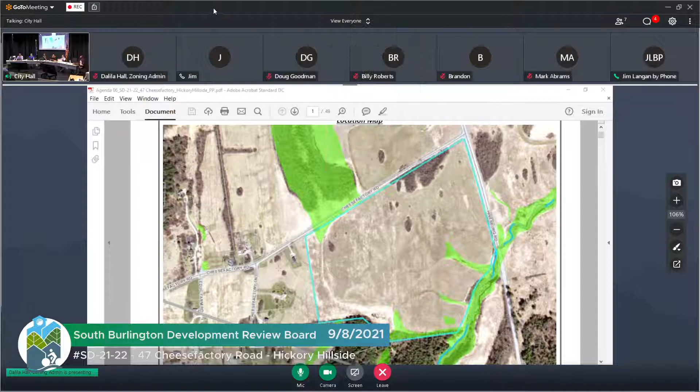Would you like to introduce us to your project? We've all read the staff report, we're all familiar with it, but it's helpful to have a little overview from the applicant. Sure. I'll briefly go into this since the board has seen it a number of times. This was the project at 47 Cheesefactory Road. It's a 67.6 acre parcel being subdivided as a 3-lot PUD: 2.6 acre lots, lots 2 and 3, and the remainder of the area would be lot 1. The majority of that would be in conservation or agricultural use.

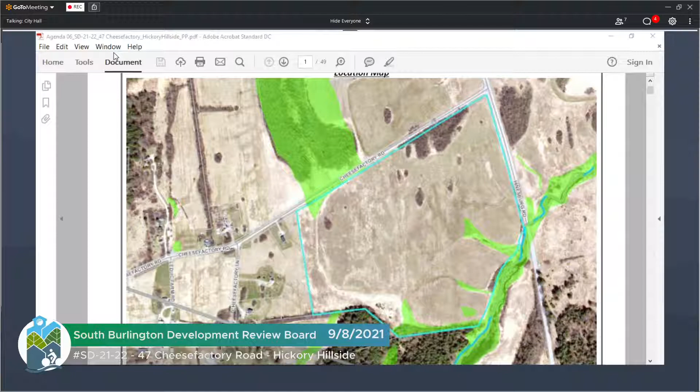Since previously being in front of the board for sketch plan, there were a few modifications that have come up, so I'll briefly go through those. Number one, we met with the state wetlands program, Tina Heath, and the wetland previously identified as class 3 to the west of the access was reassessed to be a class 2 wetland, with an associated wetland buffer. As you're aware, the way the state handles wetlands and agricultural use may vary from the way the city does. So although this is a class 2 wetland, the agricultural use currently happening is not an issue for the state. It's non-jurisdictional, meaning the associated wetland buffer attached to it is also non-jurisdictional.

So so long as there's no impact to the wetland, there's no wetland buffer, which means that the state is happy with our current proposal, which actually is relocation of the access driveway off of Cheesefactory Road approximately 30 feet to the east. So we're now avoiding the wetland.

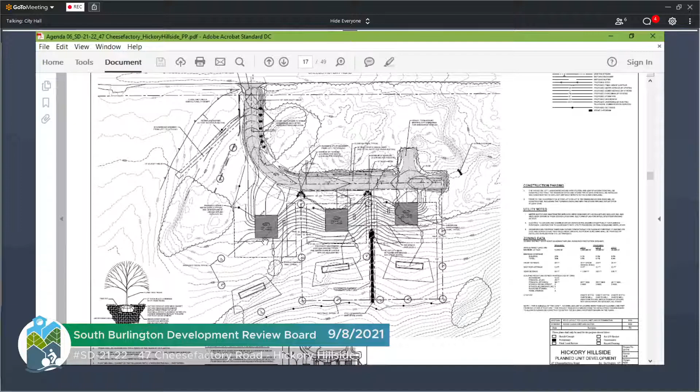So that we had some flexibility to site the houses based on the wastewater system's possible movement, and some other items as far as grading and ledge in the area. So we are requesting some flexibility in the building lots. Those are pictorial footprints for houses. Okay. Any questions or comments from the board? Staff? No. Okay. Moving on to staff comment number 2.

And this is in regard to landscaping, stormwater treatment, etc. Staff recommends the board discuss with the applicant how they have, quote, minimized and are offset by appropriate landscaping, stormwater treatment, stream buffering, and other mitigation measures, unquote, the proposed wetland impacts in the context of the functions and values provided previously in the staff report.

Staff considers if the board finds minimization or mitigation to be insufficient, there may be simple measures that can be taken to offset the proposed driveway and grading impacts. Staff recommends the board and the applicant work together to develop specific changes, if any, such that the preliminary plat hearing can be closed and the modifications addressed at the final plat stage of review.

Madam Chair? Sure, go ahead, Dan. Did our stormwater public works staff have any comments on this? No, because it's under the half-acre threshold, they kind of shut down on it and said it's under the half-acre threshold. And I said, thanks for your feedback. Okay, thanks. But the LDRs have criteria, and the criteria are related to wetland impacts. So does everybody understand kind of what happened with the wetlands and how it's non-jurisdictional for the state, but jurisdictional for us?

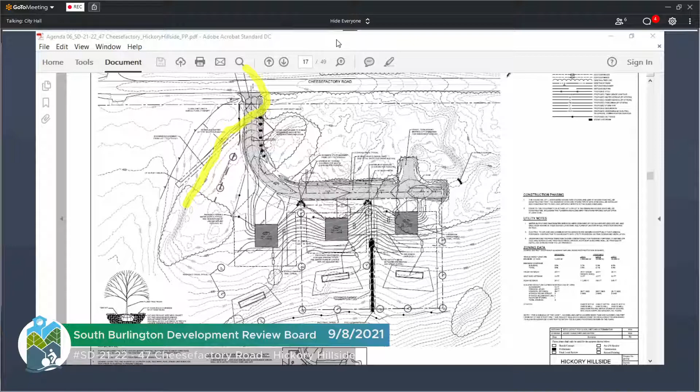And just for Nick's benefit, some of the members of this board were not on the board at the time of the last iterations. Yep, sorry. Other questions from the board? Thoughts? Do we think that the applicant has presented adequate measures, or would we like to see more at final plat? Is there much of a drainage that it's actually going to cross? Like, is there going to be a culvert under there?

We are currently showing a culvert, yep, and it does discharge, you can see, into the wetland buffer to the west of the curve. And it's not a large drainage area, but it's significant enough to have some kind of drainage across it. And if I could just point out any mitigation that we may have done, if the board deems it

that, we have shifted the driveway 30 feet to get fully outside of the wetland itself and reduce impacts to the buffer. We've removed the bioretention area that was totally within the buffer. We're providing some minimal landscaping even outside of the buffer that does kind of delineate that area. There are options for reducing the road width, although that would probably be very insignificant as far as minimizations go. But yeah.

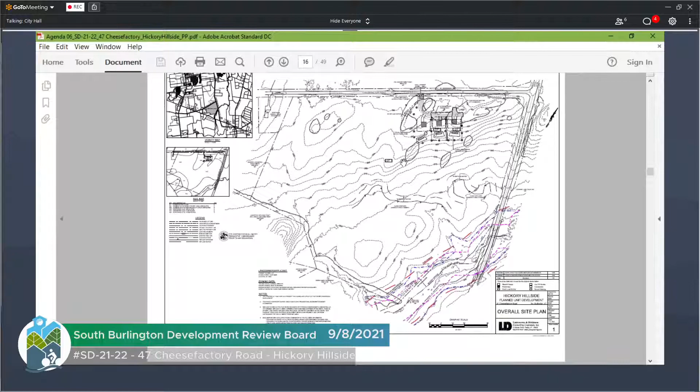And is there any kind of internal farm access road, or anytime the workers go back and forth to their housing, are they always going on Cheesefactory Road? I would assume that they would be accessing from Lot 1. That would be my thought, that they're accessing off of the internal access drive that we're proposing from the Lot 1 driveway, more than likely.

I want to make sure I understand. So they would have to go out to Cheesefactory Road? I guess my understanding is that they would not be doing that, that they would be internalizing off of the Lot 1 driveway, the lot farthest to the west there, and they would probably be accessing off of the end of the turnaround that we're showing on the far east lot. So is there an internal farm road that we're just not seeing in this drawing?

Just talking about the new proposed gravel driveway, the access driveway that's serving these lots. So if they want to access the farm, we're talking Bread and Butter Farm, right? I'm talking this lot in particular here. The farm they work for is Bread and Butter Farm. Yep. So if they want to get from their house to the farm without going on the road, what do they take? Well, they would then need to use Cheesefactory Road.

Okay, sorry, that's what I was trying to clarify. I was misunderstanding. This lot, as far as the agricultural use on this lot, they could access internally. Obviously, anything that's not on this lot, yes, they would need to go onto Cheesefactory.

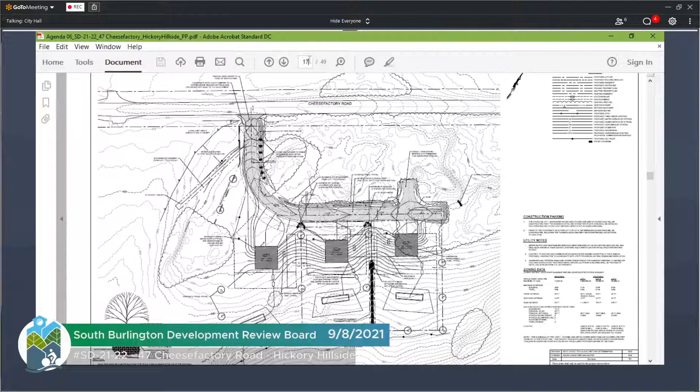Moving down the report, number 4. Staff recommends the board determine whether the road should be reduced to 18 feet wide at the wetland buffer crossing. The reduction would slightly reduce wetland impacts, but its location near Cheesefactory Road would make the turn into the private road more difficult. What's the rough distance between the edge of Cheesefactory and where this would be proposed to be reduced to 18 feet?

I'm just trying to get a sense of that. It really would likely be reduced in width for less than 50 feet, and then it would be outside of the wetland buffer, and I'm assuming it would be required to be back at the 20 foot access width. So it's bottlenecking right at Cheesefactory Road, the last 50 feet approximately. So the reduction to 18 feet would be in the right of way of Cheesefactory? It would partly be in the right of way, and my assumption would be a total of 50 feet, maybe 25 or 30 feet past the right of way. Do you have a sense of where this line would be drawn?

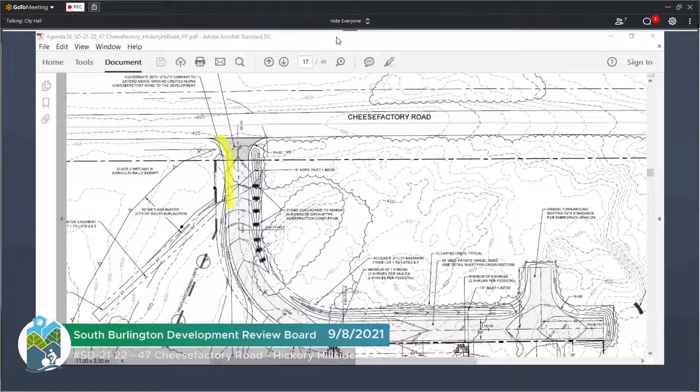It is right at the entrance, but how many trips are you anticipating, and are you seeing a lot of conflicting in and out throughout the day where this would actually become an issue? If you did neck it down and there's not a significant number of trips, it really wouldn't cause too much of a problem.

Yeah, I think that is a valid point, that there would not likely be a lot of in and out conflicts. I don't know what other type of equipment will be maneuvered in or out, or trailers or anything like that. So the standard access width may have some benefit for the maneuverability of larger vehicles. But I see your point as well, that there's probably not a lot of conflicts with only three houses on this at maximum.

So can you all think about that, and we'll look at it again at final plat? Yeah, we'll see what we can take a look. Okay. The thing would be something like the board asks the applicant to consider. Yes. Okay. Thank you. Certainly.

Number 5, staff recommends the board discuss whether they will require the applicant to reduce the width of the lots to meet this criterion. Staff notes the board approved the proposed lot dimension in SD 19-35, but since that approval is expired, the board is in no way beholden to that decision. Okay. What do we do with this? Board, should we require the applicant to reduce the width of the lots?

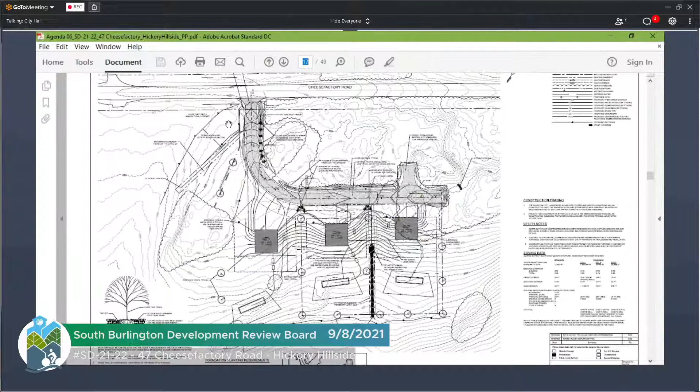I have a more basic question. Sure. We've got 3 lots here that are all supposed to be farm labor housing, right? Owned by Bread and Butter Farm, rented to Bread and Butter Farm. I don't know if that's going to be an easement or in any way enforceable. But it's all one common owner really, so is there a way to have 1 septic lot instead of 3?

We are exploring the possibility of combining this wastewater system into one system, especially in this case where you've got quite a bit of elevation change. You might be able to reduce a couple tanks because there is the ability to centralize that. We haven't gotten far enough to determine what will be most efficient, but there is a chance in the future that would happen, and it would require a shared easement between all the lots over that septic system. It is something we are considering, but we just have not gotten into the full design on that yet. Thank you.

Other questions, Jan? Is it feasible to have lots fully compliant, can you do this with lots that are essentially half of what you're proposing? Because I'm looking at staff comments saying the applicant is proposing lots double this size.

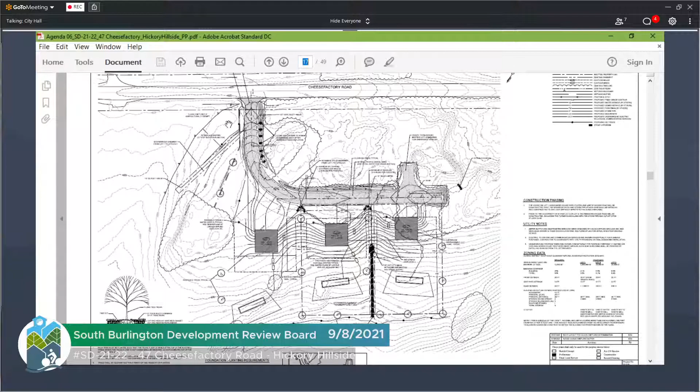If it were any other applicant besides a farm, we'd say you need to be closer to the lot size. Well, this is the minimum lot size, correct? So this is about the lot width to depth ratio. And the purpose of the width to depth ratio is to create lots that have sort of a neighborhood feel to them. So narrow, deep lots tend to push the buildings towards the street, and people are more engaged in their neighborhood. And Delilah's the planner in the room, so maybe you can speak more to this, but is that generally correct? And that makes for a friendlier neighborhood.

Right. More engaged. So the idea would be having skinnier lots would make these homes closer together and have sort of a friendlier neighborhood. But given that there's only three, that's sort of the counter argument, like, why bother? There's only three homes. And they probably know each other anyways because they work together. And we don't want to be together after work too.

Exactly. And we were talking too about the building setback envelopes that we were proposing earlier. So as you can see, they are pushed up towards the new access, so they wouldn't allow for these lots to be very far backward, very far south, I should say. So it does accomplish, it sounds like, the goal essentially. Are we ready to move on, or do folks have other questions?

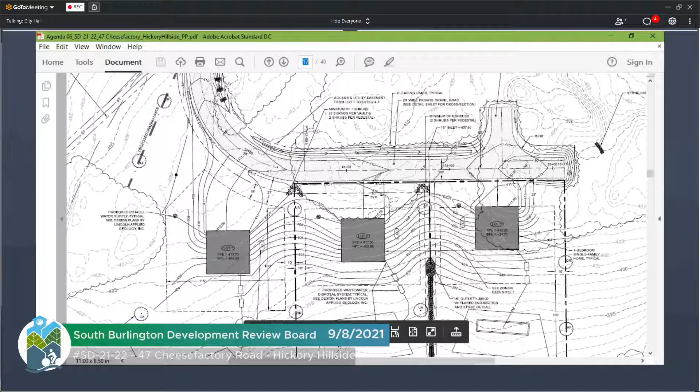I think that's it for the staff comments. Are there any general questions or comments, folks? I have a question more for staff. Are we hypothetically approving this as just single-family homes that are allowed? Or are we approving this as farm dwellings? Because they're all still going to be owned by Bread and Butter, right? So they can't be sold, right? Is that correct? That is not a condition of the city's approval.

However, in the packet, the draft conservation easement does have some restrictions on the use of this subdivision. Let's see. You don't have that at your fingertips, do you, Nick? My apologies, I didn't read that. I have it in front of me. There's kind of a lot of restrictions that get placed on it. Here it is, it's page 32. This is the farm labor housing, paragraph 11. They can construct 3 residential dwellings with customary appurtenant utilities and improvements. And then it lists what shall be freely alienable.

Oh wait, sorry, that's the access for easements and things. So the land trust conservation easement restricts the use of them. And so by incorporating this into the DRB's decision, it would be restricted in that way. I guess what I'm trying to get at, because I can't read all that right now, and I apologize, I should have read it before, is if we're approving this and we're approving the easement, I just want to be sure that this doesn't basically become open market rental, that it's serving its intended purpose.

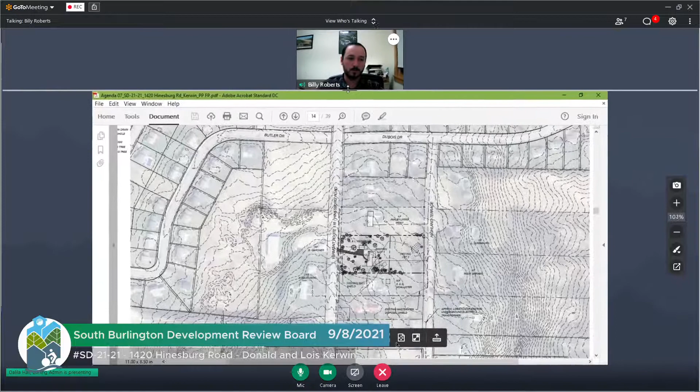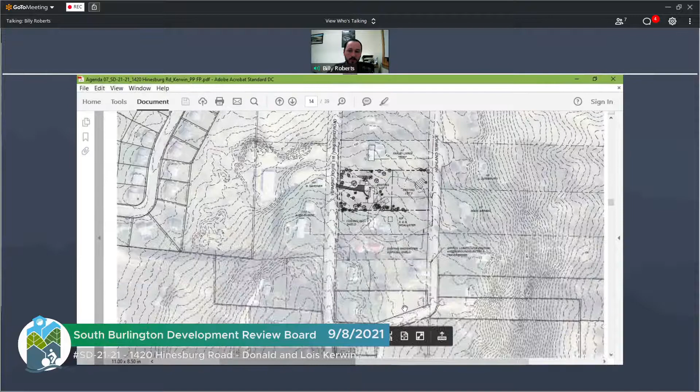This application seeks to divide lot 2 into 3 equal lots, which would make it a PUD. This is southeast of Butler Farms. The connection point would be on Highland Terrace Road, which connects off Dubois Drive and loops down to Route 116 Hinesburg Road. This application seeks for each house to have its own driveway, and each home would have access to an on-site drilled well. Two of the houses would share one well, and one house would have another well drilled. All the wastewater flows would go to municipal sewer.

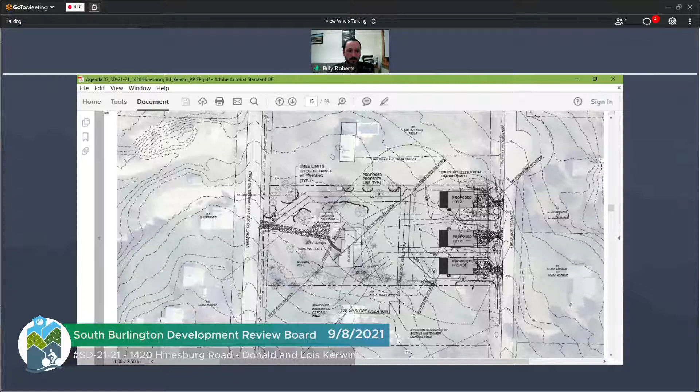And yeah. Is that it? Yes. Okay, good. Thank you.

So let us look at the staff report and go through the staff comments, and the board can share its thoughts with you, and you can respond to the comments as well. The first staff comment is the applicant's plat plan notes the lots are 12,000 square feet, while the application form indicates 11,979 square feet. Staff recommend the board ask the applicant to clarify. If you could do that, please, that would be helpful.

Yeah, so these are 3 equal lots, they're all 12,000 square feet in size. Okay, thank you. Does the applicant need to make any changes to any of the documentation? What the plan says governs, so I think they are okay.

Okay, thank you. Number 2, staff recommends the board consider whether the scrub tree area on the east warrants requiring the applicant to minimize disturbance to allow for tree preservation. Staff notes the location of the home supports a strong street presence, and preservation of these trees may detract from that presence. If the board determines the applicant should preserve trees, staff recommends the board require the applicant to update the plans to reduce impacts and show a limit of tree clearing.

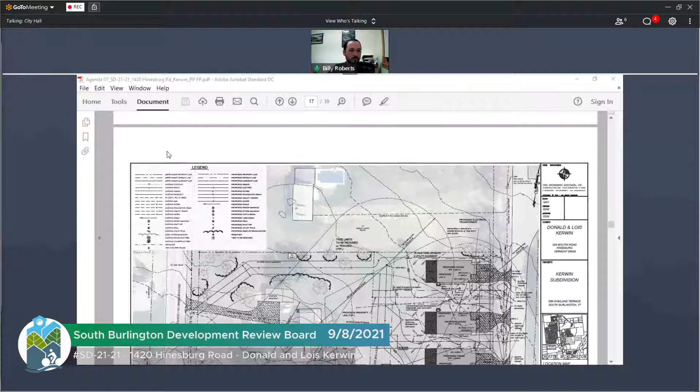So I guess we'll ask you, Billy, if you could respond to this, and the board can ask any questions. Yeah, so right now we're showing there's a lot of scrub trees that aren't that visually appealing, and a lot of these trees we are showing to be removed for installation of utilities. The removal of these trees would allow for a fresh start in the area. It's kind of an overgrown area, not really well maintained.

So a fresh start might be beneficial for this. So when you say a fresh start, are you talking about removing all the scrub trees and vegetation there and making new plantings? The option for new plantings would be available. We are not proposing any plantings at this time, but we are proposing to remove all the trees along Highland Terrace for installation of utilities that would support the project. I'm sorry, did you say installation or insulation of utilities? Installation. Okay, thank you.

So, questions about removal of the trees? Just to be clear, the entire frontage would be stripped to accommodate the utilities?

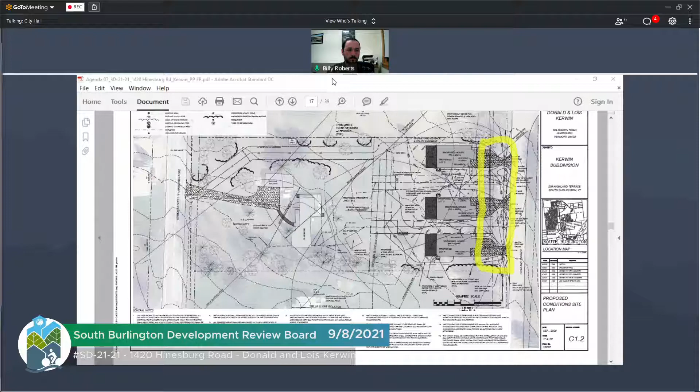Yeah, that's correct. And I guess what I'm getting at is, is this one of those things where we're essentially approving the lots and individual homeowners can do what they want at the time? Well, this is a PUD, so not exactly. There are restrictions.

I think the board tends to be a little more flexible when it's not intended to be a large neighborhood, but individual lots that are stuck with being a PUD because of their location in the SEQ. But the board does have the authority to place whatever restrictions they feel appropriate on these lots.

Personally, I'm okay with the 3 separate driveways because you're trying to create a neighborhood feel. That's okay to me, and I guess to the extent that some of the clearing can be minimized, only to not shock the neighbors across the street, then come back with some ideas or options, or maybe it's a combination of some clearing plus some new landscaping elements. That's kind of the way I feel.

So just to be clear, this is preliminary and final plat, so they won't be coming back for final plat. Okay.

Other folks, comments, questions? What is our pleasure then? Shall we? Well, one other thing we could do, I don't quite remember if it was in the...

We could go to Google Street View and kind of look at the trees too. Okay, I know I'm putting a lot on you all of a sudden. Have Delilah stop sharing in order to bring up the internet.

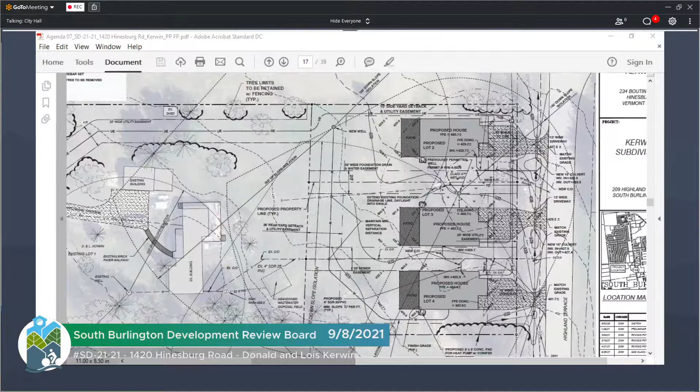Can you give us any guidance about what's preferable in design? Well, if they're in the city right of way, they're the city's responsibility to maintain.

Billy, there's no overhead utility here, right? No, not on Terrace. Okay. I don't know that we have... typically the arborist reviews what they propose and approves the type of street tree.

So can we require a certain number of trees in consultation with the city arborist in our future decision? I think that's reasonable. If you're specific about it: deciduous species with a caliper no less than 2.5 inches at installation, 2 per lot near the eastern property line, or 2 per lot within the city right of way near the eastern property line, whichever you prefer. I think that's specific enough.

Okay, board, what do you think? Right of way or property?

Does the city have other plantings along this road that it maintains? No, not on this road, I don't think. But elsewhere, other developments get street trees. Dubois Drive, I believe, has street trees. So they're not that far off from other places.

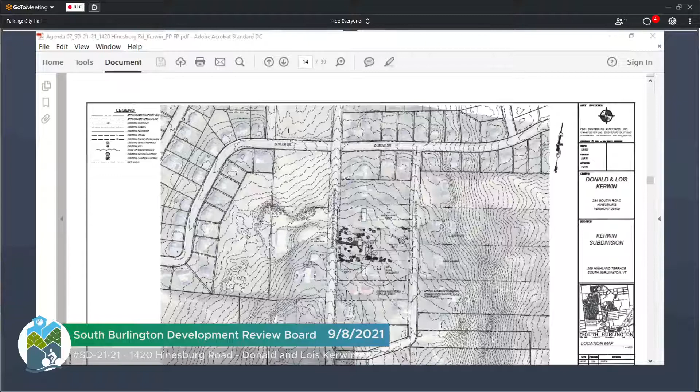And the board has the opportunity to revisit this topic if the public comments are relevant and interested in changing the decision. Would you mind sticking around while we get through the staff comments, and then we'll be glad to hear you? Yeah, I'll try to do that. Thank you, what is your name please? Mark Abrams. Oh yes, we've heard you in the past. Thank you.

Okay, staff comment number 3. Staff considers this response does not adequately address the related criteria, referring to the applicant's response to the criteria or values outlined in the Vermont wetland rules. Staff recommends the board discuss the above 3 criteria, A through C, with the applicant, including responses to the following questions: What is the wetland's ability to carry or store floodwaters, and how will that be affected by the project? How will the project minimize sedimentation? The driveways are proposed to be gravel. The wetland functions and values may not be significant, but how is the proposed condition an improvement over existing?

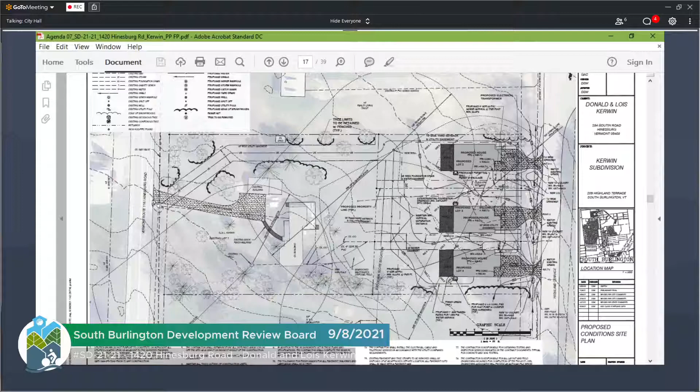Can you go to the map and get out the magic marker and show us what kind of wetlands we're talking about and what is the relative impact? Because we're trying to balance the wetland impacts with some good density here and small lots. So the wetland is, oops, let me try again. Wetland is here-ish. And it's a class 3. And then the buffer, you can see, obviously is around the wetland. It's kind of a bullseye. Sorry, that was me.

So, and again, because I'm still relatively new to this, given this situation, there obviously would need to be mitigation measures because the impacts are right on top of the wetland and the buffer. So, what would be some things that those in the professional community would recommend? Is it additional landscaping along the back of the lot to help, I won't say recreate a wetland, but provide some of the treatment functions that a wetland provides through more vegetation?

Well, and I think that's where the functions and values come in. Knowing what functions, however limited, this wetland provides. If it's habitat, some vegetation may be useful. If it's stormwater treatment, a little bit of detention might be appropriate. You know, if it is, I don't know, whatever other functions, I think the mitigation, if mitigation is required, should be tailored to the functions.

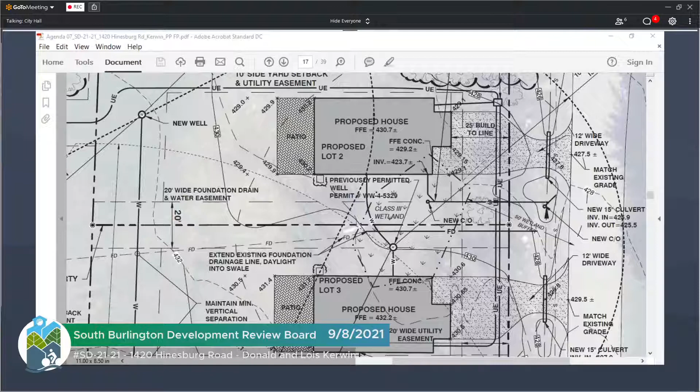Okay. But the water goes somewhere, right? It goes, drained into the swale. Into the swale, so on the street. Right, they're redirecting it into the swale, and then that will discharge. If you looked at Google Street View, there's a catch basin that's kind of off to the side of the road. So it looks to me like that's where it would all eventually drain to.

Okay, so I asked the weird question, but since the back of the lot abuts the back of the lot of the other property from which it's being subdivided, is there a way to have it drain to the west and create? I think elevation goes. I'm sorry. Yeah, the eastern side is downhill from the western side. How far, or what's the relative grade?

I only say this in part because I have a sump pump, a whole house drainage system, that before I bought it used to discharge into the city's stormwater system. Instead, I have it discharge into my rain garden, and it runs pretty regularly. So if we're trying to maintain a wetland, is it feasible to pump and essentially create a wetland on the back of the property?

I would ask the fundamental question: do we have enough information to decide if it is worth jumping through a bunch of hoops for this wetland? And if we do have enough information, is it worth jumping through a bunch of hoops to protect this wetland? What's the board's temperature on that?

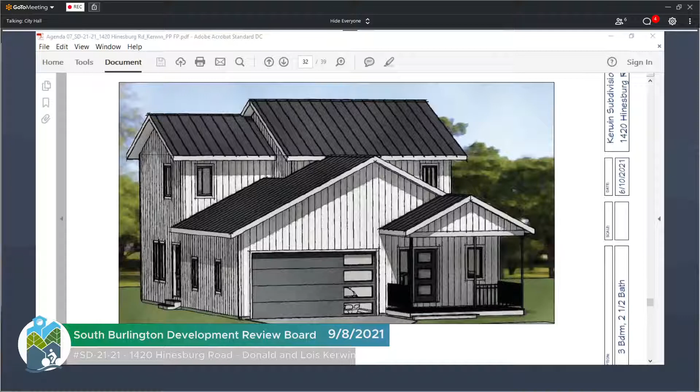A minimum of 35% of translucent windows and surfaces should be oriented to the south. And then the rest of the standard is about the SEQ NRN, which is not us. So the ones that are musts, they have covered, and the ones that are shoulds, they may or may not have covered. But you can see from this one that there's just not a lot of glazing, and I didn't do the math, and they didn't provide the math. Mm-hmm. So maybe we could ask for that.

Yeah. The board in the past has found that a should is not a shall and has not worried too much about it. I would look at this and I'd say maybe 20%, 25% is oriented to the south. That's not terrible. It's not the best. So yes, you can ask for that, certainly, and then make a determination. Or you could decide that this is okay, or you could say what would be most helpful is either decide it's okay tonight or tell them come back with some extra windows next time. Or meet it next time, so that we just have it cut and dry, done.

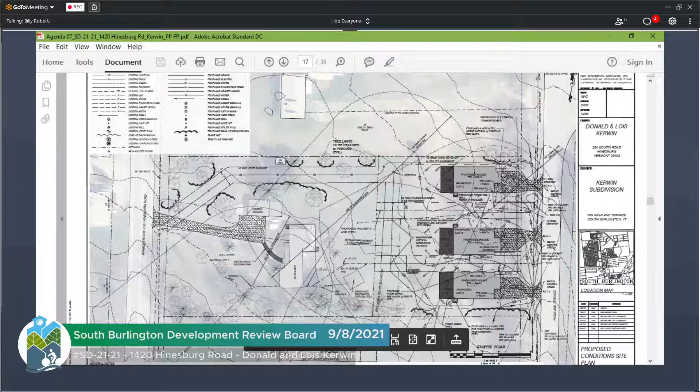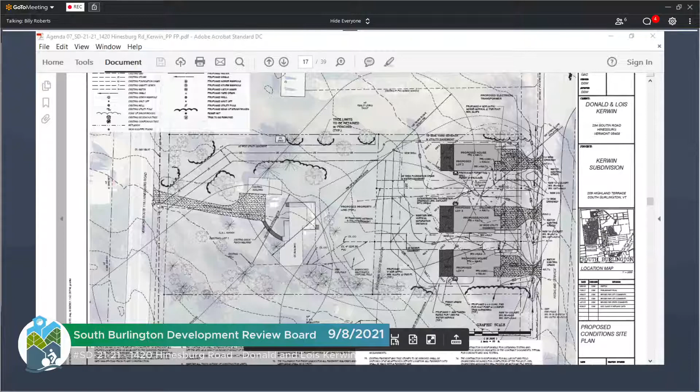the primary goal for the applicant is to get the PUD in order to sell the lots. It's likely that when it comes time to be built, there may be design changes with the homes. Right. By making them a little wider north-south, you could decrease the dominance of the garage, but I'm also concerned about the lack of glazing. I think that would improve the attractiveness of the houses.

So in criteria 9.08C4, which is on the same page as comment number 5 that we're talking about, there is some language about the building width needing to be at least 12 feet, and the garage must be set back at least 8 feet. If the board is feeling like that is not cutting it with this style home, there is the opportunity to modify that criteria somewhat. Though, this is the standard that the Planning Commission has set. And I always caution the board that when there's a specific numeric criterion that the Planning Commission has chosen, if you choose to impose conditions of a PUD that differ or waive it, you are taking on a policymaking role as opposed to a quasi-judicial role.

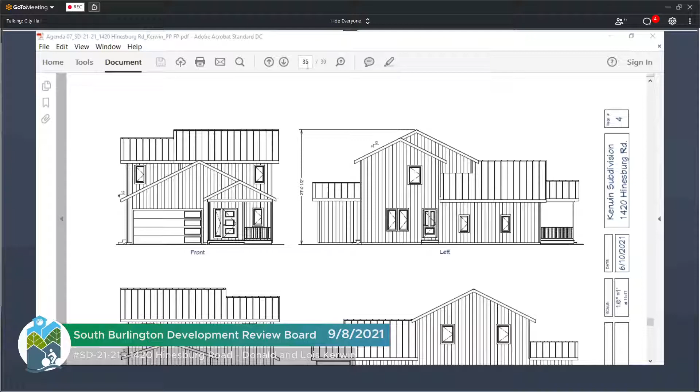Are you referring specifically to that glazing number? No, the glazing number I'm less worried about. The glazing number is a should, and the board does tend to apply it as a should. I'm talking about standard number 4, that the building width of a single or two-family dwelling shall be no less than 12 feet, and the garage needs to be set back 8 feet from that minimum 12-foot section. But I didn't think the garage looked like it was set back 8 feet. Is it? It is, because the porch is 8 feet deep. Oh, and that counts. Okay.

But in this case, the building width is still going to be more than 12 feet, right? So that's fine, that's met, right? Right, so the specific numeric criteria are met in this case. So the board's concern, I think, is with the regulatory language less than with what they have shown. Okay. Unless it's because of the style of the building that it has a different appearance than what you're used to seeing.

Okay, so what do folks think? And just to be clear, I'm just applying my aesthetic grumpiness about the dominance of the garage. That's all. There's no real standard I'm applying, right? Well, there is a standard, and they've met it. 8 feet back. Right. Yeah, the setback part's okay. It's just more, there is no standard about could a 3-car garage go in front? As long as it's set back at least 8 feet, and yes.

Okay. That's the next round of revisions to the LDRs. Sorry. No, I think that's a great thing to bring up. Every time you write a regulation, as you well know, there's always that one thing that pops up where you're like, oh, we didn't consider. Didn't think of that. Yeah. Right.